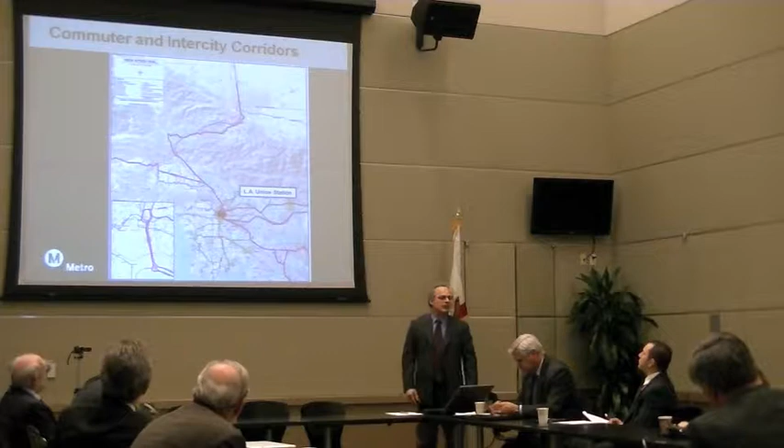So, also, we manage the right-of-way that these carriers operate on that's owned by Metro. At a quick glance, these are our intercity corridors, and the red dot is what you'll hear me refer to as Rome. All roads lead to Rome, that's Union Station. And you'll see all of the yellow in the background. The yellow is right-of-way owned by Metro that either has transit on it or will be getting transit.

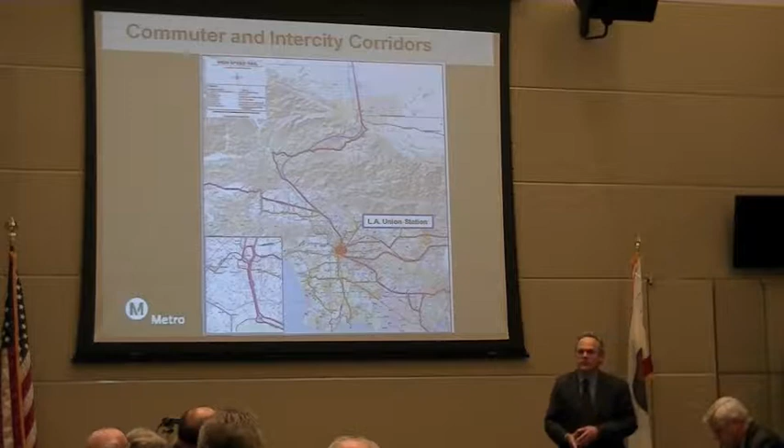The important thing to consider is that when you look at these transit connections in concert with the regional rail connections, it tells you that it's all about regional connectivity. It all blends together. It's not either or, it's usually a combination of both. Somebody comes from San Bernardino on a Metrolink train and then gets to Union Station and then takes a Red Line to go to work in downtown Los Angeles.

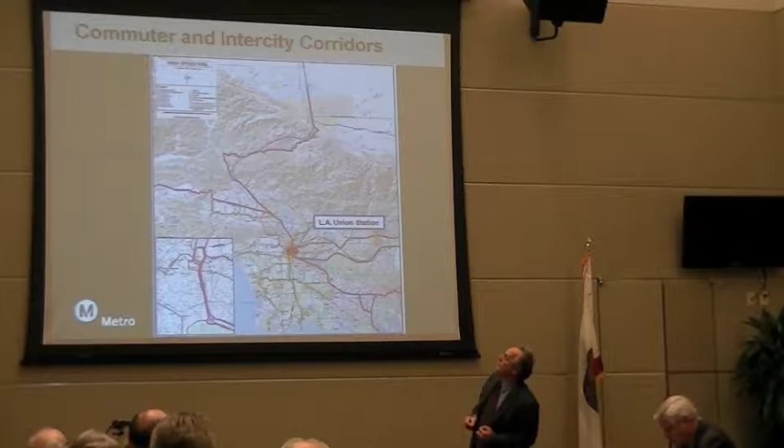And also, up to the top there, you'll see a purple line going out to Antelope Valley. That's the high-speed rail route. And again, you'll notice that it's all right there. These are the planned high-speed rail corridors as of right now. And I say that as of right now because nothing is really final yet.

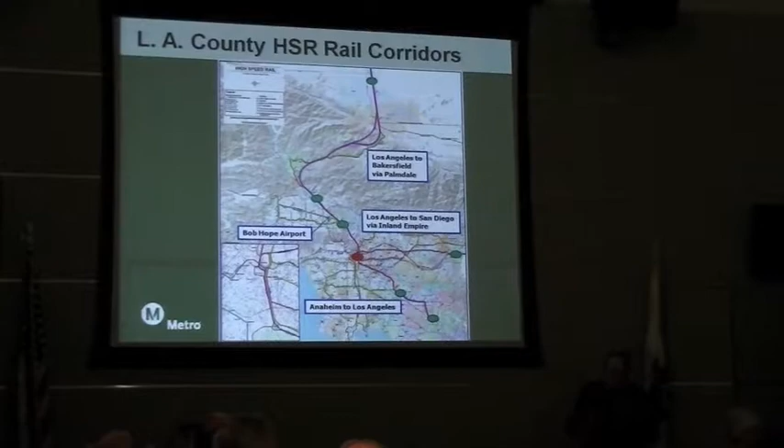Some of the ones that are having the big challenges, we've got some segments in the LA to Palmdale segment that's got some environmental challenges we'd have to work through. Same thing going to the Inland Empire—throughout there we've got some challenges. Anaheim to LA, we've resolved many of the environmental challenges, but we're going to have somewhat of a different vision for high-speed rail there than was actually originally planned.

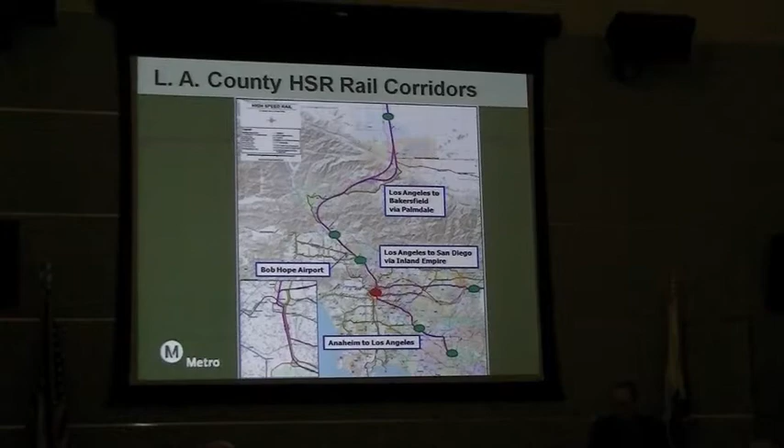But you'll actually notice, if you look at that very closely, I'm going to take you back one step. Notice that many of those high-speed rail corridors are the existing Metrolink corridors. And that's important as we get further along, and I talk about a couple of other things.

So the greatest high-speed rail news, here's up to date. Of course, you know the business plan—we've heard all about the business plan. It was released on November 1st. Comments were supposed to have been received by the 16th of January. They did receive a lot of comments. They're going to be doing some significant work on this.

And we've been working really closely with high-speed rail on this business plan, particularly Chapter 2, the blended approach. Some of our sister and brother transportation agencies up and down California have been meeting with them. We've been going up to Sacramento and working with them on these plans to try and develop a means to fix the problem. And it's a different high-speed rail than it used to be.

I refer to myself as being cautiously optimistic to them because it seems that they're on the right track. One of the things that is really key to high-speed rail is they have to start thinking of themselves as part of the transportation system of California, not just as a high-speed rail system.

They're part of that regional rail network, and as part of that, they have to bridge the gap. They have to give us a one-seat train ride between Los Angeles and the Bay Area that is not a bus, and that is a significant problem we have. So they've also recommended not moving forward with the I-5 Grapevine, so the high-speed alignment will go through Palmdale as a station. That's very important for us at Metro.

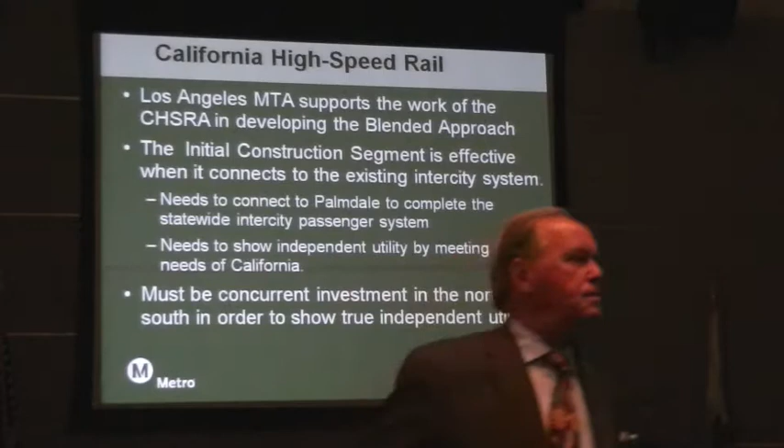Our official position has been that we support the work on their blended approach. It's an important step, and as part of that approach, it calls for some investment in other transportation systems. We believe the initial construction segment they've identified in the San Joaquin Valley is only effective when it connects to the existing intercity systems, and we believe it needs to connect to Palmdale to complete the statewide intercity system. If we get a train from Bakersfield to Palmdale, then we can get trains up to Palmdale to bridge that, and we can actually have the opportunity for a one-seat ride from the Bay Area into Los Angeles if that happens.

And since Metro owns the right-of-way, that's fairly simple once we get the trains there. We need them to show independent utility by meeting the needs of California. And meeting the needs of California is not having a rail line that's just independent, just a segment of rail line where you can go a couple miles an hour faster. What we believe is that it should connect and should provide additional transportation options for California.

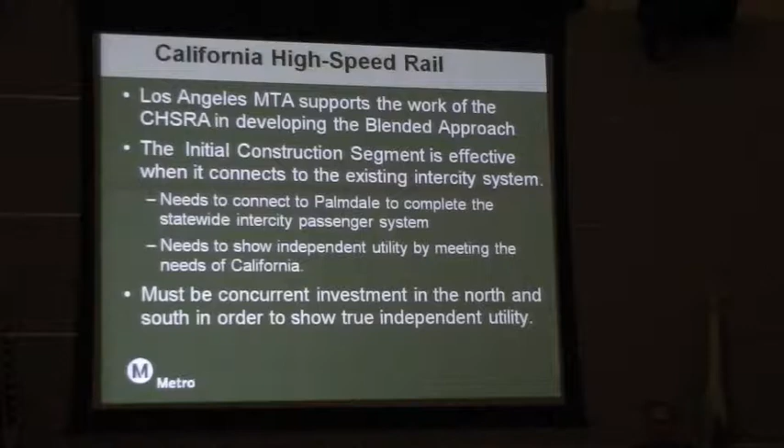Probably the big thing for us is there must be concurrent investment in the north and south. We believe that you can build that initial construction segment, but you have to show value to the voters of California by building in the Bay Area and building in Southern California. And you're going to hear me talk about that right now—advanced investment. We are working to partner with high-speed rail to develop projects in LA that actually benefit the existing rail systems as well as the future system.

A particular example is the grade separations. A grade separation of the Metrolink corridor along San Fernando Road would benefit Metrolink initially. It would benefit the commuters of the area, but it would also provide an avenue for high-speed rail in the future. One such example is Doran Street. As you know, Doran Street is probably the poster child for unsafe conditions at a crossing, with a propane facility right adjacent to it. And poor John has been on the receiving end of a whole lot of stuff on this one.

Metro put forward a board motion to put $6.6 million into improving the crossing. We leveraged that to get a $32 million grant from ARRA to fund a complete grade separation. This is moving forward rather quickly, it looks like a done deal. We still need the final word, but it's going pretty well.

John, we need to set up a little conference between you, Jaime and myself to talk about this. Anytime we bring money, we're getting money. I've been told to write the RFP for this. Okay.

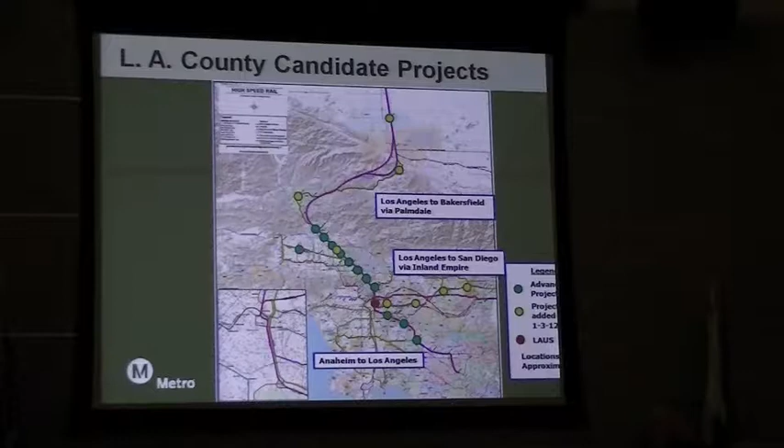Again, the red dot is Union Station, and in Metrolink you saw this thing before, so I won't go much further on that. But know where Bob Hope Airport is, that's pretty important when you think about it.

Mark sent a great article about Bob Hope Airport, though I still haven't been able to open it up. For the longest time, Bob Hope was the only commuter airport on a commuter railroad line, if you can believe that. Some airports have light rail or other things, but a commuter rail line was rare in the United States.

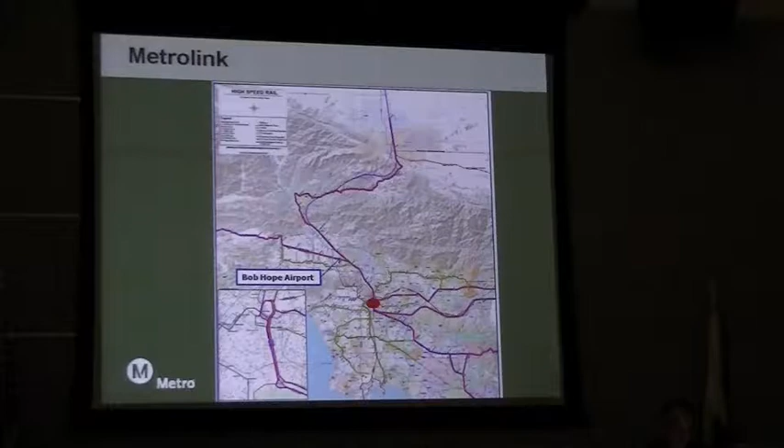A few years ago, Billy Mitchell opened up a station on the commuter route. Billy Mitchell Field's in Milwaukee requires a shuttle. But Bob Hope Airport's got this unique place right in the crux of Metrolink to provide great transportation options, with a station on the Ventura line. So it's important to think about regional connectivity.

We have a $51 million annual work plan with Metrolink—that's just our portion. We work with Metrolink on capital projects throughout California, including grade crossing issues and siding projects. We're starting strategic studies that hadn't been done before. There's a lot of improvements going on at Union Station now, and there will be over the next couple of years, and we're working closely with Metrolink to make those happen.

I did want to talk specifically about the Antelope Valley line. It's the true line that's completely in Los Angeles County, running from Los Angeles Union Station all the way out to Palmdale. This line is very important to us—it's the third busiest line in the Metrolink system, with about 5,800 daily riders.

The problem is it's about 2 hours to travel from Palmdale to Union Station. It's not real beneficial for commuters, and if you're traveling really early, frankly, it's actually quicker to take a car. The problem is it's a series of hairpin turns—the track geometry is limiting the speed. It's an old 100 to 150-year-old freight route, just not conducive to quick commuter times.

But the key is segments of the AVL are actually on the high-speed rail corridor and the LOSSAN corridors, which opens them up for interesting funding possibilities. The segment of the Antelope Valley line south of Burbank Boulevard gets about 89 trains a day between freight, Metrolink, and Amtrak—pretty significant. So we're trying to reduce those travel times to an hour, and I'll speak frankly, we're having trouble doing that.

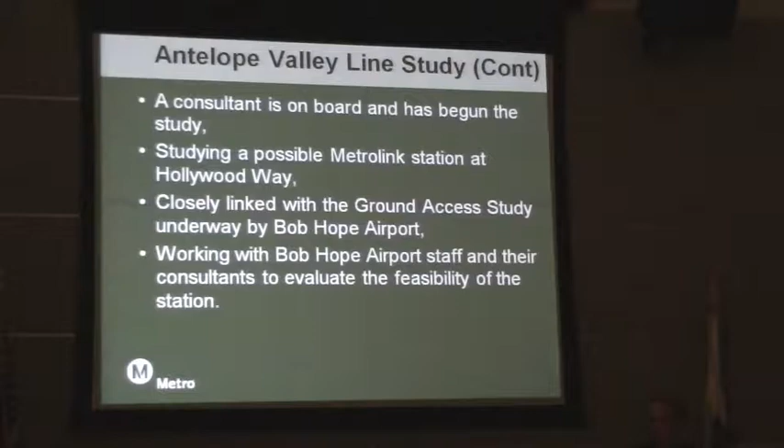So that's kind of the idea. And when you expand that out and think towards the future, when we finally bridge that gap between Bakersfield and Palmdale, you can go from Bakersfield down to Bob Hope Airport and then fly out. So the prospects are great.

Coincidentally, the most efficient ones are Coaster and Metrolink. Amtrak runs about 20% less in on-time performance than the other two over the same trackage. And of course, they blame other people - it's not their management at all. This is the second busiest commuter rail corridor in the country, next to the Northeast Corridor.

So the future for this corridor is we are actually working with the other member agencies to develop local governance for the corridor. I don't know if you're familiar with the Capitol Corridor up in Northern California - it runs between the Bay Area and Sacramento. That is managed locally by a separate JPA to handle the day-to-day business of that corridor. Amtrak operates it, Caltrans funds it, the state funds it, but it is managed and administered by that local agency.

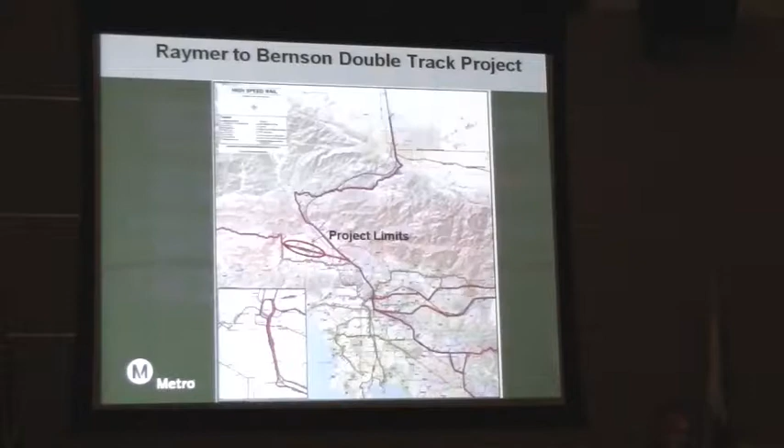I signed the funding agreements for this thing actually two weeks ago, so we're right on track. We are expecting to be completed in February of 2013 with a little kick and prodding on the consultants, but that's the way we do it. I can do that since I'm a former consultant - it's fun.

There's actually a partner grant that we received as a second grant to redo Van Nuys Station. Right now, there are two tracks at Van Nuys Station, but a single platform for passenger rail operations. So this will actually look at what that entails to fix that.

There's another little wrinkle in this as well, and I don't know if you've ever noticed this, but somebody traveling by bus on Van Nuys Boulevard does not have a really good connection with the Van Nuys station. They stop about a block away, they walk up the gauntlet of stairs, which I would be afraid to walk up myself in broad daylight, much less anybody else. So we need to look at that and figure out a different way to get some circulation going in there and make that work better. And that's important, because if you don't make it inviting, they won't come, and we need them to come.

Again, the same thing with this - we're partnering with Metrolink on this, and it has the same criteria as the other one. It's going to be quick.

So our next steps is we're developing plans for strategic studies on other rail lines in LA County. The San Bernardino line is the busiest in the Metrolink system. There's over 12,000 riders a day on the San Bernardino line between Union Station and San Bernardino.

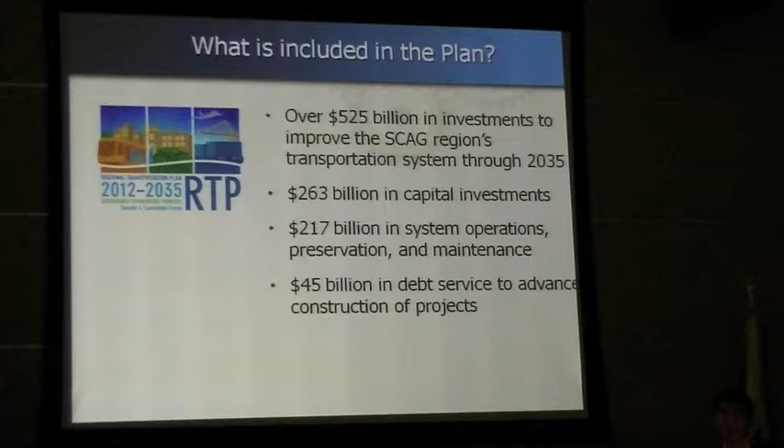So what's in the plan? We've got over $525 billion in transportation improvements and strategies, in nominal dollars, not constant dollars. Out of the 525, about half is for capital investments, almost another half for system operations and maintenance, and $45 billion of debt service so we can construct projects sooner rather than waiting until we have all the money to start building and put them on the ground.

Just to give you an idea of some of the major modal investments we have in this RTP: on the highway side, we've got $72 billion for highway improvements and $22 billion for arterials.

It's in a small box at the bottom, but we can't understate the importance of operations and maintenance in this region—and not just this region, but this country has been underfunding operations and maintenance over the last few decades. A great number of our roadways and bridges in this region have fallen into a state of disrepair. So this RTP allocates $57 billion for highway O&M and $21 billion for arterial O&M to get our roadway and highway system into a state of good repair by the year 2035.

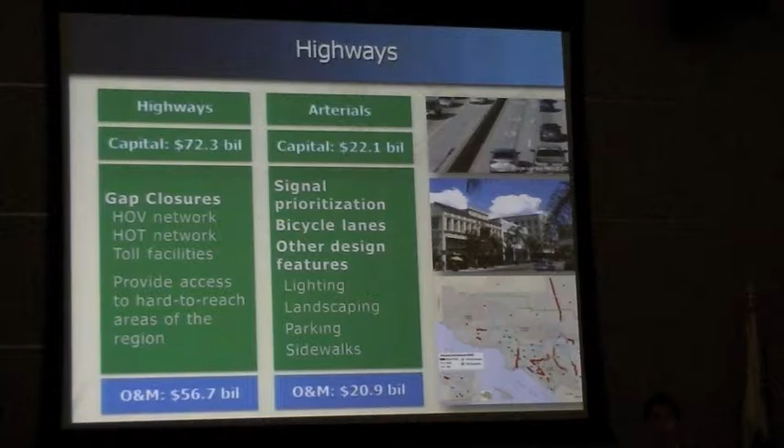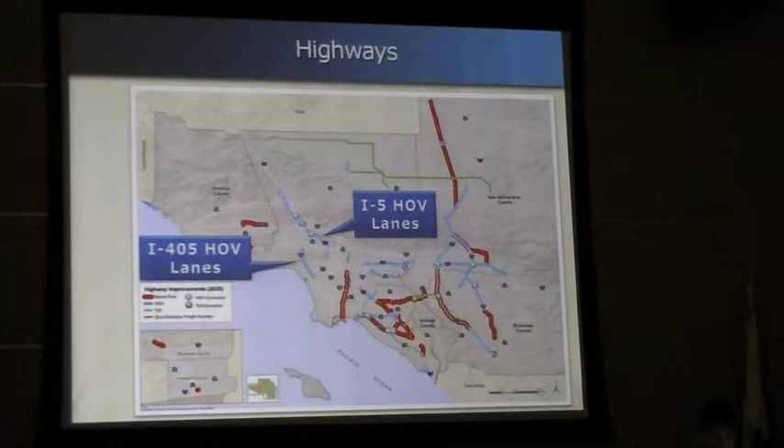In terms of transit and passenger rail, we've got $50 billion region-wide for transit, and our definitions of transit and passenger rail are identical to what Don mentioned. Transit means the bus system and bus rapid transit, as well as light rail and heavy rail in this region. On the passenger rail side, we've got $52 billion of investments—this is for Metrolink, improvements to the LOSSAN corridor, and phase 1 of the California high-speed train system. You can see that huge figure at the bottom for O&M for transit.

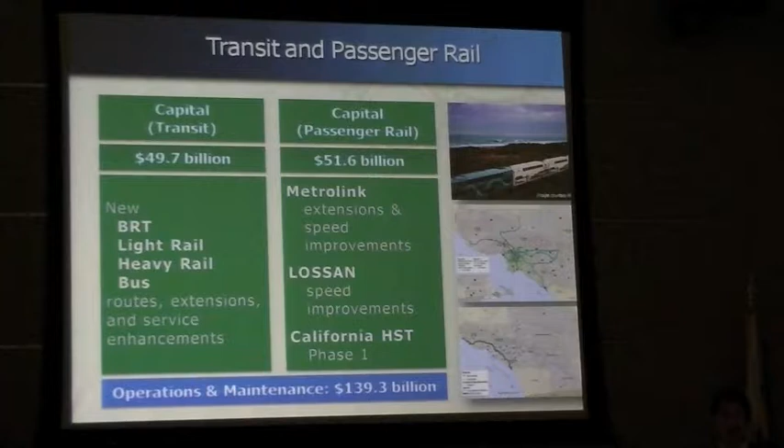We need $140 billion to continue to operate our transit system here. That figure not only includes continuing what we have today, but also enhancements to both the Metrolink service as well as increasing service on existing bus lines throughout the region.

That's significant because if you were to look at a map of passenger rail transit in 1990, this is what it would have looked like—we had nothing on the ground. By today, this is what we've built. Of course, it's nowhere near enough, and by the year 2035, this is what we plan to have on the ground, according to the RTP SCS.

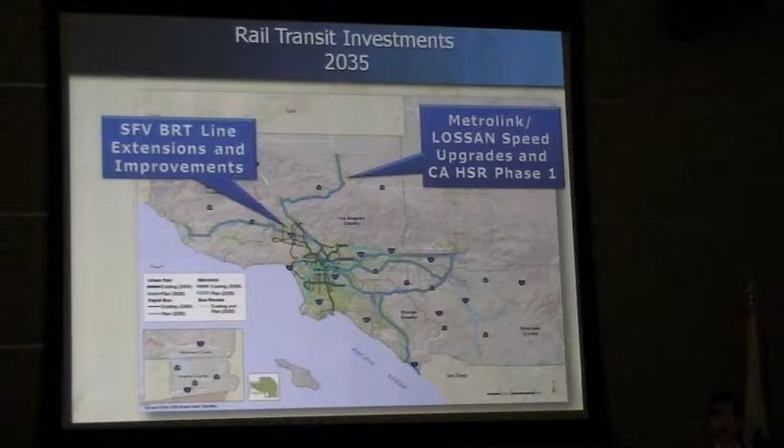In this area, we've got several bus rapid transit line extensions, as well as service enhancements working their way through Metro—a multi-phased effort, and the first few phases have already been implemented. There are a lot of extensions to the BRT lines here in the valley, with a couple scheduled to come online in the next couple of years, all by 2020. Also, as Don already talked about, the Metrolink LOSSAN improvements, all the improvements from the Antelope Valley study, as well as phase 1 of California high-speed rail—these are all assumed in the RTP constrained plan as things we will fund and make happen.

Getting off of highways and transit, when we're talking about integrating land use and transportation and making better integrated decisions, TDM, transportation demand management, and active transportation becomes a really important strategy. These were almost afterthoughts in previous RTPs, but especially in this RTP with SB 375, we realized that if you can increase TDM strategies, if you can increase the use of active transportation in this region—active transportation being defined as non-motorized transportation, either biking or walking—we can take a lot of cars off the road.

This RTP allocates $4 billion to TDM. We allocated about $2.5 billion last RTP. Active transportation, we allocated $2 billion last RTP. We've tripled that to $6 billion for this current RTP. That money is going to go to increasing the mileage of bikeways in our region from 4,600 to 10,400.

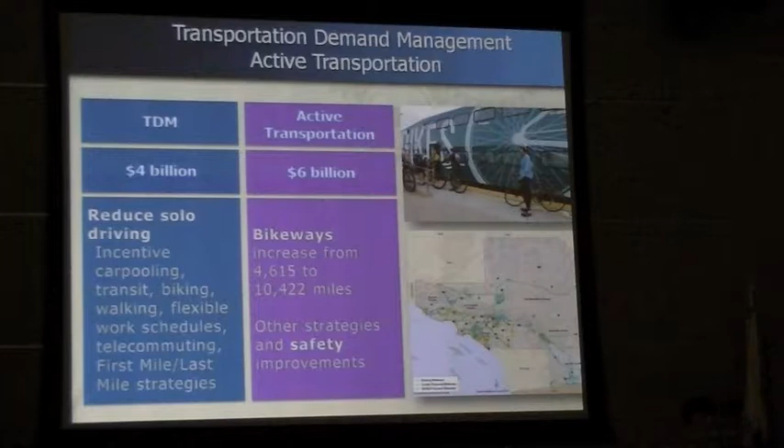Once we get that on the ground, we'll be able to increase the percent of people in our region who live within a quarter mile of a bikeway from 42% to 62%. So it's all about accessibility and providing the opportunities for people to get on a bikeway, to get on a walkway, or be close to work where they can bike or walk, not only to work or recreation, but also to connecting transit.

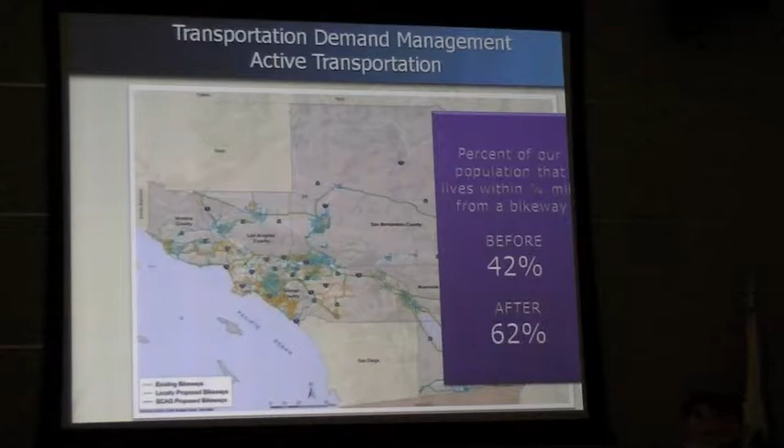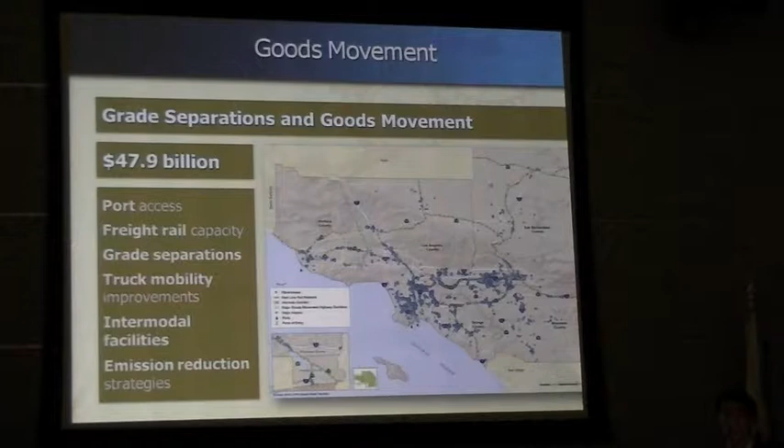Goods movement is another huge strategy for our region. We're looking at—many of you have heard about—the East-West Freight Corridor to get trucks more easily out of the ports into the inland ports. In this area, the major goods movement strategy is the grade separations, and that will benefit us not only in terms of arterial traffic and getting cars to have to stop a lot less frequently, but also improve our safety in the area, as well as get freight through the area quicker, resulting in air quality improvements as well.

In terms of land use, we've actually been doing integrated land use and transportation planning at SCAG for years now. We've had the Compass Blueprint demonstration projects, which we've only continued to enhance as a result of SB 375 and the push for sustainability. That's really been a great project for not only SCAG, but all our member cities, because 100% of the money that we get from the feds, from the state for Compass Blueprint, we funnel to the cities. We do a call for projects, and cities tell us how they want to study or implement local projects that bring transit closer to opportunities, work opportunities, residential opportunities. This RTP continues to emphasize that.

So at the end of the day, I mentioned before, we've got $525 billion in investments. But this is probably our greatest challenge. I mean, we've got air quality, we've got mobility challenges, but at the end of the day, Southern California is smart enough to know how to fix these problems. The greatest challenge is how are we going to pay for the solutions that we've identified.

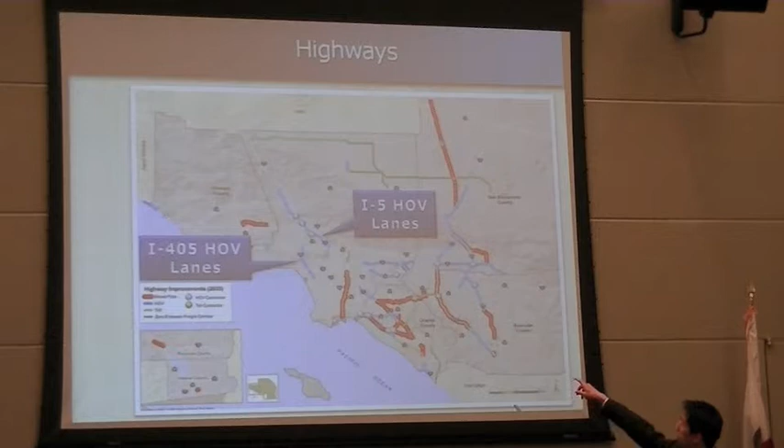In the slide on gap closures, didn't show, if I understand correctly, the 710 extension is included? The 710 extension, north, through South Pasadena. Yeah, that's actually that green line right there, right under that corner of the I-5 HOV line. So it is assumed that it's funded. Yes. In the $72 billion capital cost, 100%? Yes.